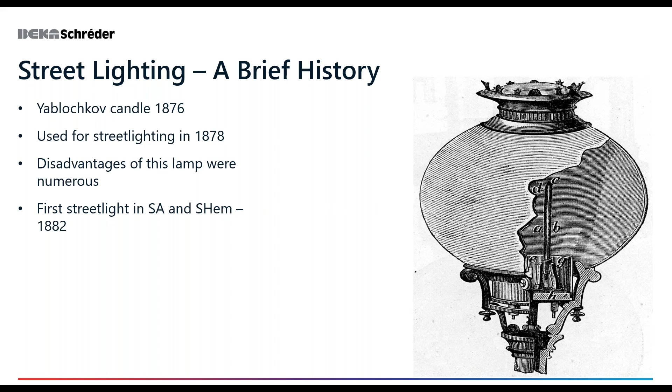The first streetlight luminaires in South Africa were installed in Kimberley on the 2nd of September 1882 on the Toitspan Road. There were 16 luminaires installed, of which 4 were placed on the corners of Market Square outside City Hall. This means South Africa was an early adopter of new technology a mere 6 years after the invention of the Yablochkov candle.

Okay, we're going to quickly go through the definitions that are very important to be understood when looking at road lighting design. So I'll move through these. We have a lot of substance to go through, so I'll try to do it as quick as possible, but without neglecting the definitions or the metrics.

So the first metric we're going to discuss is luminous intensity. The luminous intensity is the power of a light source to emit light in a given direction. It is the luminous flux emitted per unit of solid angle or steradian. The luminous intensity is a quantity for characterizing a light source and its perceived brightness.

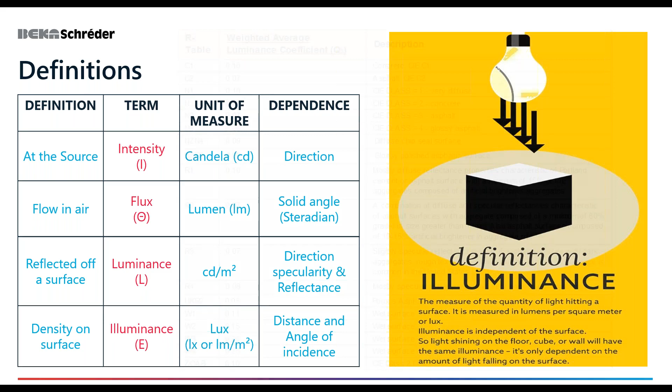Road surface reflection is a function of the physical state of the road, its nature, the direction of illumination, and the conditions of observation. Here you'll see a table showing all the different reflection factors used internationally, and there are many more. This can change. It's almost innumerable, but these are your standard reflection coefficients. Different pavements have different reflection characteristics, which depend on the texture of the surface, its age, the materials included in the pavement, the binding materials, the paving method.

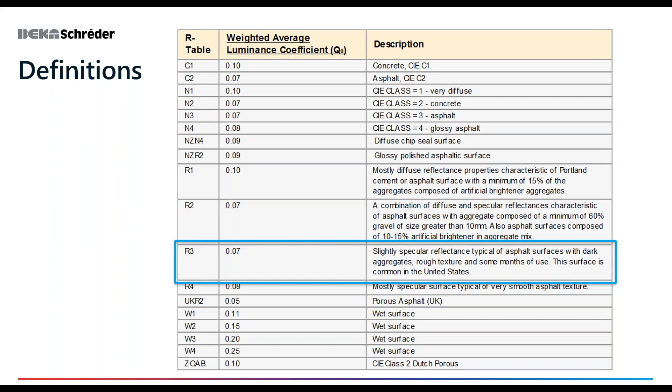And you'll see that we in South Africa base our standard calculation on a reflection factor of R3 0.07. This is a slightly specular reflectance, typical of asphalt surfaces with dark aggregates, rough texture, and some months of use. Some months of use means basically we're using a reflection factor that is typical of a new tarred road. This surface is common in the United States, but it's also the one we use as per CIE 140 in South Africa, and that is what our standards are also based on, CIE 140.

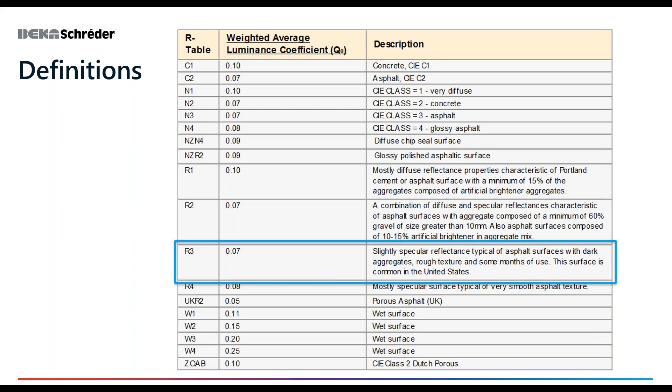It's also a conservative way of calculating the spacing between poles, because if you went up to an R3 0.08 reflection coefficient, you would have a slightly more specular type of reflection, a bit more mirror-like because of all the driving and friction over time on that road, and this would potentially give you the option to increase spacing, but it's not what's done as a standard practice, and this is something that you, the client, will be able to tell us: listen, this is a R3 0.08 road, please design according to that. But generally we will stay with a R3 0.07 new asphalt reflection factor.

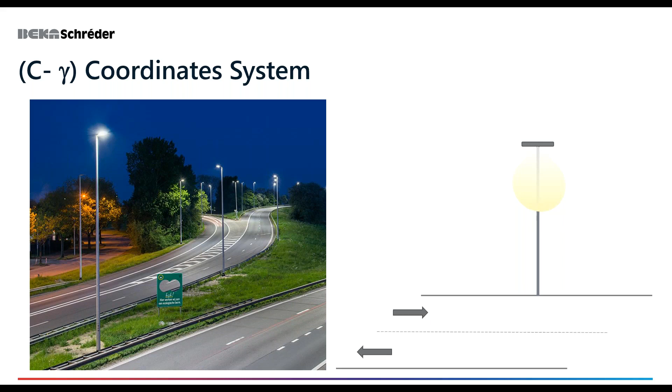Okay. In street lighting, it's also important to know and understand the orientation of the luminaire. In order to do this, it's necessary to know the standard coordinate system used to photometer a streetlight luminaire. There are two axes that are used, known as the horizontal or azimuth angle and the vertical or gamma angle. And in this little animation, you'll see these planes. C0 is to the right of the luminaire as it's facing the road. C90 is to the front, commonly known as roadside. C180 is to the left of the luminaire, and C270 degrees is behind the luminaire, commonly known as the house side.

The vertical angles, which you'll see there in the animation: for the vertical axis, also known as the gamma axis, the luminaire is photometered according to the CIE system of allocating vertical angles relative to the lamp. 0 degrees indicates the position directly underneath the lamp, also known as the downward vertical or nadir, with 180 degrees being the position directly above the lamp, also known as the zenith. The vertical axis is divided into 36 measuring angles, also known as the elevation angle, or more commonly the gamma angle.

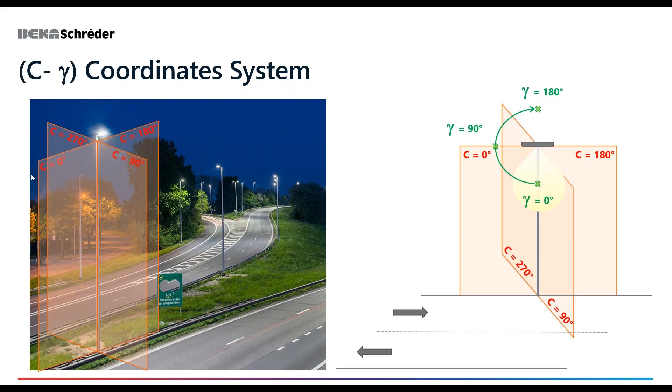The polar diagram is something you'll typically see in any manufacturer of luminaires' catalog or brochures, and something that quite often happens is clients or stakeholders don't really... A lot of people are afraid to ask questions about the polar diagram. And it's actually a very simple diagram to understand, and that's the intent of this slide, to just make this a little bit more clear.

When looking at the polar diagram, you will notice three distinct planes, of which two were mentioned in the previous slide, and their corresponding intensity values in candela per kilolumen at different angles. The candela values are expressed in candela per kilolumen for a good reason. Instead of making 2 or 20 different polar diagrams for the same photometry or lens that was used at different correlated color temperatures or driving currents, we simply plot the results for 1,000 lumen or 1 kilolumen.

This means, very simply, that if a lamp has a nominal output flux of 2,000 lumen, we would simply multiply by a factor of 2. And if it has a nominal output flux of 5,000 lumen, we would multiply by a factor of 5. It's really that simple. You'll see in that image there, I've tried to make it very clear how the luminous flux is emitted from the luminaire. In red, you will see I've created the physical shape of the luminaire.

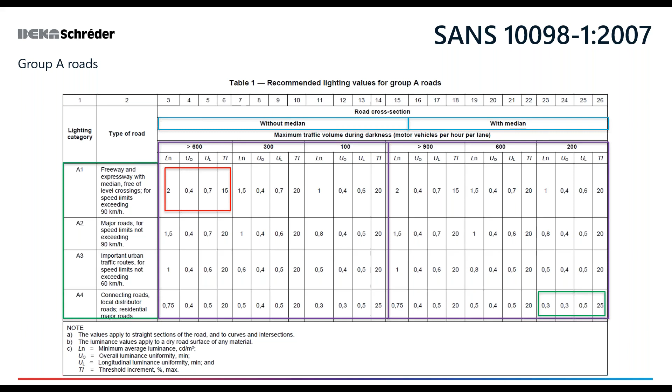Okay, then moving on to B-class streets. Just for your information, a street and a road: a street is normally determined by the fact that it has walkways, walking areas next to the road. So it's generally in built-up areas where there are residences and shops and so on. That's just for interest. B and C class streets are where illuminance levels are considered. So that's the type of light that can be measured but not seen. We design for illuminance in these areas because they are more dynamic regarding the type of road user.

On an A class type road where we're working with luminance, you're really only expecting to be sat in your truck or motor vehicle or motorcycle, looking ahead of you for extended periods of time. But in a B class and C class road, it's a much more dynamic environment. You have cyclists and runners and motor vehicles and the neighbor's cats, and these all could potentially pose risks to the person using the road. So therefore, we intend to ensure that there is enough volume, if you like, of light in space in this area, so that on the road, the measured incident light will not be lower than the required standard.

The environment is such that the driver might not be, as is the case with A-class roads, only looking ahead for extended periods of time, but rather that they might be expected to look around more often in order to avoid that neighbor cat or the kid or another car making a bad decision.

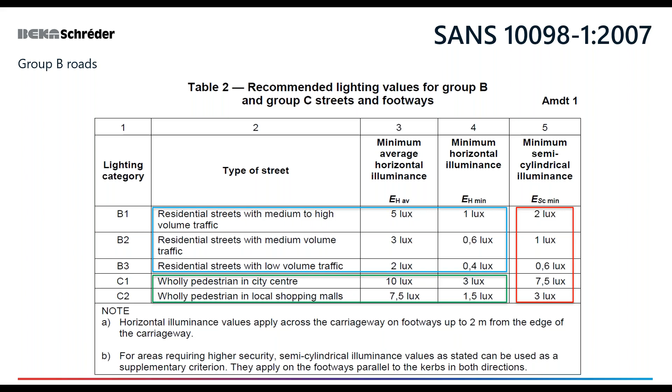Okay, we'll then move on to the software that we use. And in this case, we're using Ulysse 3.5.2, which is the latest version of Ulysse. You'll see the database version there is 2020, that's this year, January the 29th. So it's the latest version of Ulysse. And what you can expect to see in such a report, the most important bits of this report.

Now that we have a foundational knowledge of the metrics of a polar diagram and of the differences between the classes of road or street, we can now interpret the design or the report that is produced by the designer much better. So typically what we would do for Ulysse 3.5.2 is, once we've done the calculation, we would generate a report, of which there's obviously the front page explaining exactly what is going to be seen.

So in designing for a road or street, it is important to ensure that you show the client the luminaire or luminaires that will be used for the results. So you will put a nice image of the luminaire to be used or that was used for the calculation.

You must then show the standard which was used to calculate the results. So our standards are SANS 10098 part 1 and 2, and they're based on the CIE 140 standard. So you can see that that is the standard that was used, if you look just below the luminaire, to do the calculations.

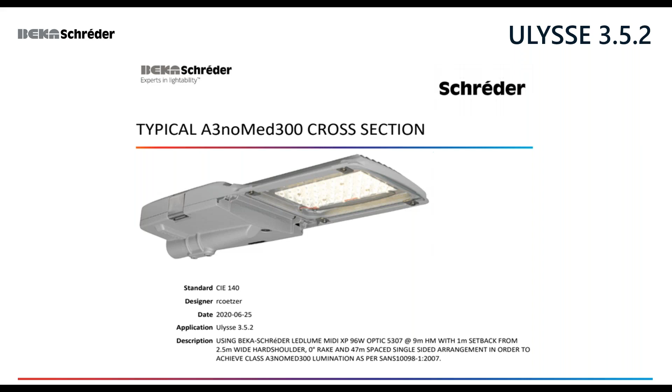This is a pseudo intensity diagram or a false color image, and these types of images are not part of the default contents of Ulysse, but it's very important for us as designers to communicate as clearly as possible what and how a design was done. So that is why we choose to include images such as the pseudo intensity diagrams, and they are shown in an isometric fashion because it gives you a three-dimensional environment where you can see the poles and luminaires and how they're situated in space in reference to the road, as well as the overall geometry of the roadway.

So once you see this, you can see, oh, hold on, it's accurate, or no, there's something missing. Where's the cycle lane, for instance? And this is a nice way to quickly see, just as a broad overview, has the designer calculated correctly? Also, like I said, you can see there's the setback of the luminaire, but we're going to get to another slide where that is made clear.

I'll quickly go through the next 5 slides just to ensure a simple understanding of these images that can be generated by the designer in Ulysse with the client's ease of understanding as the main prerogative. So like I said, this is a pseudo intensity diagram. This is a very nice way to understand, because a lot of the time it's one thing to see 2 candela per square meter with 40% overall uniformity and 70% longitudinal uniformity. But what does that mean visually? What am I expecting as the road user?

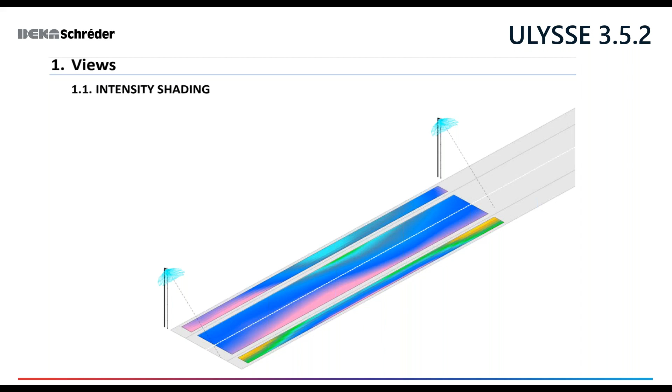So if we only look at the driving lanes, you'll see that there's a green area right between the luminaires in the center of the first lane. That would potentially be the brightest spot of lighting, and then it starts shading into a pink where you might have a darker area, but it's dark relative to the bright. It's not that there's no light, and we'll see that with the legend a little later on.

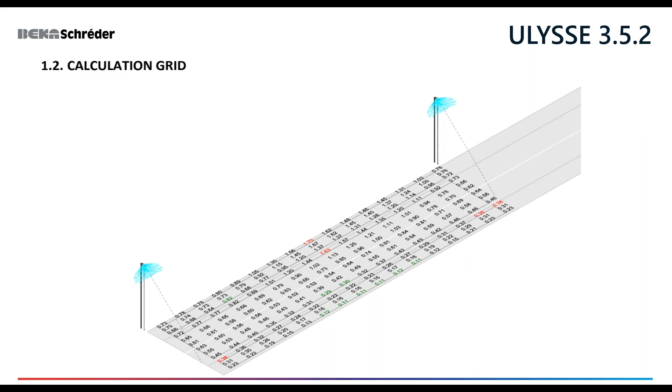You'll also then see a calculation grid, which we also include, because it's nice to have all the images showing all the different visual interpretations of what you can expect. And here you will see all the candela per square meter values measured at those individual points, and your ISO lines basically connect all values of the same candela per square meter, and then you have this really nice interpretation. In a later slide I've superimposed these, and it gives you a very good understanding of how the light is interacting with that area and how the observers are experiencing this driving environment.

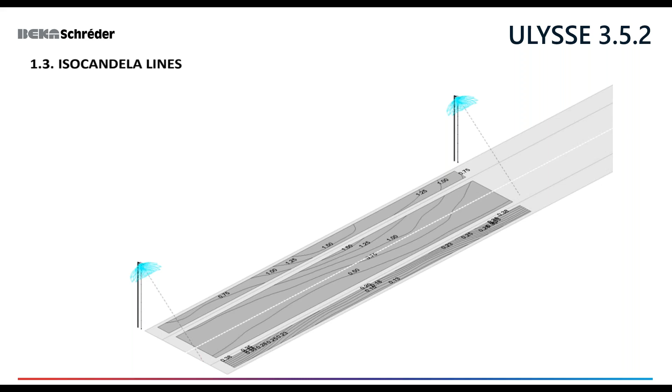Finally, we also include a cross-sectional view. Generally, we say left, but it could be right. It doesn't matter. Just to show the rake, whether this luminaire has been raked or not, and where the peak intensity of this optic sits. So you can see this luminaire was not raked, which is always a good thing, specifically with regards to glare or threshold increment. And you can see that the peak intensity on this luminaire is quite far. It's actually reaching almost to the opposite side of that second lane, or the fast lane, if this was going in one direction.

Then we create this image that we build to show all the geometry in meters. So you can see that here we used a 9-meter pole.

It was 1 meter set back from the yellow line. You can see it's got a 150 mil spigot, so no real outreach, and we're achieving a 46-meter spacing to the relevant standard, and I'm going to get to that point. I've included 2 hard shoulders, and there you go. That's a 9-meter pole covering about, what, a 12-meter, 13-meter, or 14-meter road cross section.

We'll move on. You'll also then see all the information necessary about the luminaire that was used, as well as the optic that was used. In this case, it's a 5307 optic. And to the bottom right, you'll see the polar diagram, which I've showed you earlier. You can see the 0 to 180 and the 90 to 270 plane.

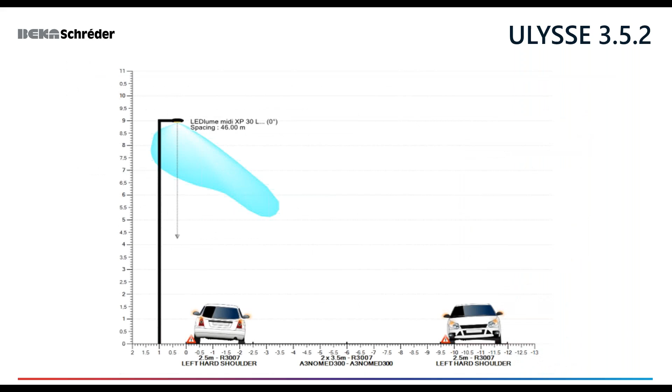We can see that going from the top to the bottom, there's a left hard shoulder. So that's obviously on to the left, where you can see left hard shoulder with the vehicle facing away from us. And then there's a right hard shoulder with the vehicle facing towards us. So coming down, the important bit is the area that's used by the vehicles for general travel.

So we'll see that we have calculated to an A3, no median, 300 class road as per SANS 10098 part 1. And to the right of that in bold, you will see it gives you the parameters that it needs to be compliant with. So we need to achieve 0.6 candela per square meter, an overall uniformity, which was your minimum to average, of 40%, a longitudinal uniformity of 50%. And by the way, longitudinal uniformity will always be higher than overall uniformity.

And then finally, your threshold increment, which is your percentage increase for disability glare for sources of direct glare. And there you can see we're achieving in lane 1 for observer 1, 0.64 candela per square meter. We're 43% overall uniformity. We're looking at 53% longitudinal uniformity. And then at the bottom, the TI is perceived as 15.3. So we're far under the 20% allowed.

And then observer 2, you can see is a 0.71 candela per square meter luminance. So we're achieving quite comfortably the 0.6 required. We've got a 41% minimum to average, so that would have possibly been the limiting factor. And then you have a longitudinal uniformity of 61%.

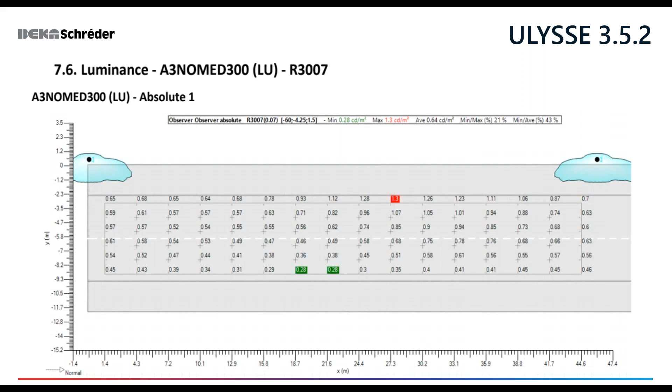This is where I would explain the first 3 images, the pseudo intensity diagram, the calculation grid, and the ISO lines. And here you can see this is typically for observer. It says absolute 1, that's observer 1. Standing 60 meters away facing the direction of travel, and you can see that they are perceiving from that position at 1.5 meters above the ground with a reflection factor on the ground of R3007, a 1.3 candela per square meter maximum with a 0.28 candela per square meter minimum.

We then overlay the ISO lines, and we can see how we're starting to build a visual interpretation in our mind of how the light that we actually see might look, and where we can expect bright with reference to dark, or dark with regards to bright, and then the pseudo intensity diagram. And that's a very simple way of understanding those 3 images that we include.

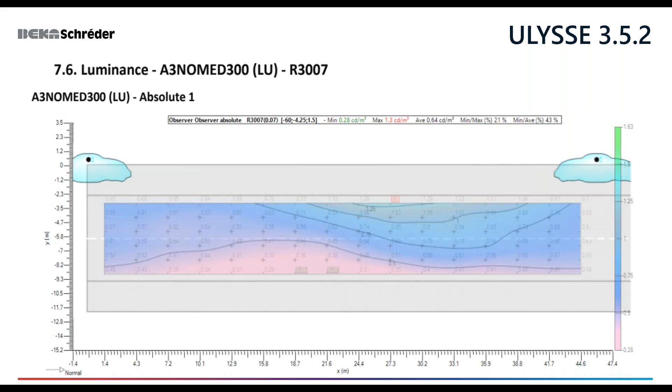So you have an isometric view, and then you have this plan view facing down. Also, you can see the way the flux is emitted by those 2 luminaires on the pole or on the poles. And then you have the exact same for observer 2, absolute 2. Okay, so that's in a nutshell the basics you need to understand so that you can interpret road lighting design. And these are some of the things we have to take into consideration at all times.

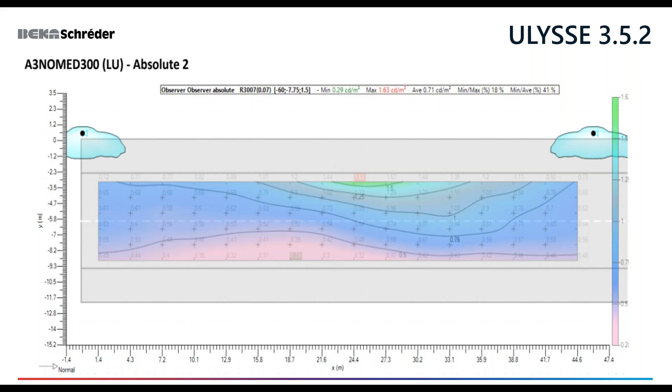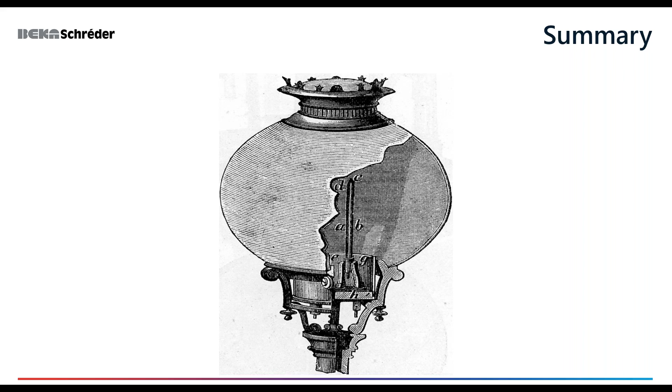I'm going to quickly summarize what we've been through. The first thing was the Jablochkov candle, and that South Africa was an early adopter of street lighting. In fact, we had the first electric street lighting in the Southern Hemisphere. So take that, Australia.

We then moved on to understanding these metrics, and that you have your light output, which is luminous flux. That's the flow of light in space. You had your light level, which is illuminance, lux, or in America, it's foot candle, lumen per square foot.

The lux can also be called lumen per meter square. And this you cannot see, but you can measure. It's the light incident on a surface. Then you had your luminous intensity. This is the candela. We saw earlier that you can measure 1 lumen per steradian in a meter square, a sphere, or a sphere with an area of a square 1 meter.

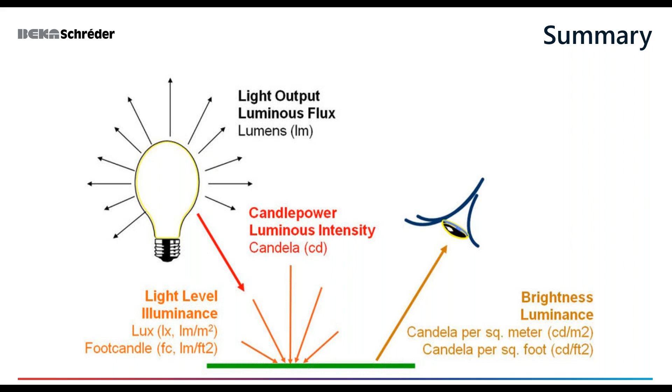And then you had your brightness, your luminance. This is what you're actually perceiving. This is what you're seeing, and that is measured in candela per square meter, or in the States, candela per square foot. This is my attempt with my ninja skills at paintbrush in explaining how a luminaire is facing the road. So you have your road side 90 degree and your house side 270 degree. Right of the luminaire is 0 degrees, left of the luminaire is 180 degrees.

The blue being the emitted flux, which is lux, you cannot see but measure, and actually you measure it at the surface. And then the yellow being how that light might fall onto the surface, having reacted or interacted with the R3007 reflection factor or other reflection factors, and how it might look.

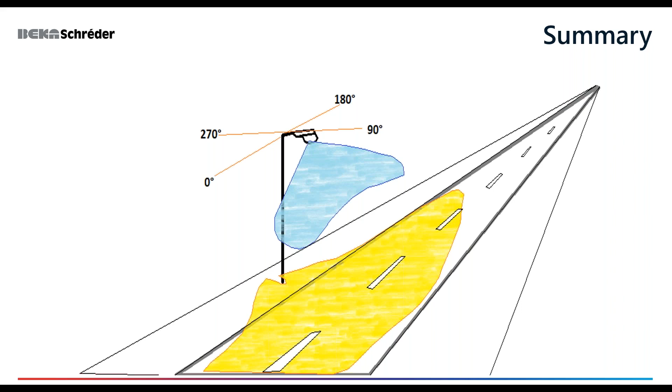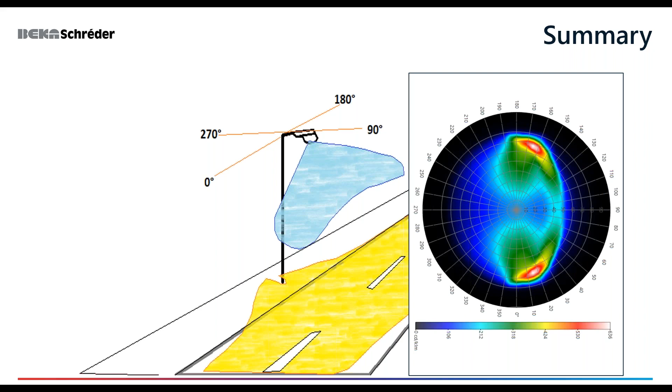We explained that A-class roads are luminance type roads where reflection plays a big factor, and that this is for the light that you can actually perceive visually. And then that you have your B and C-class streets where illuminance is measured and calculated for, and this is the type of light you cannot see but can measure. Any questions?

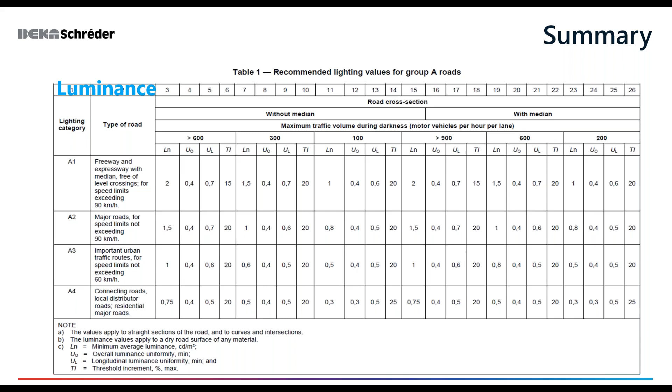A2 is a major road for speed limits not exceeding 90 kilometers an hour. A3 is important urban traffic routes for speed limits not exceeding 60 kilometers an hour. And then A4 is your typical connecting roads, local distributor roads, residential major roads. And then obviously your B, it explains it there. But then the question is primary and secondary roads.

I think generally with your A-class roads, you would have primary and secondary in both classes. Your A1 to A2, maybe even your A3 could be primary A-class roads, with the secondary being your lower level of A3 all the way to A4. And then the same for B. You could have a primary B-type road being your B1, and then the B2 and B3 could potentially be your secondary roads. But I'm speculating. Okay.

Do you have, sorry, I'm going to read this. Do you have LED bulbs that can replace street lights, 150 watt HPS, 250 watt HPS, and 400 watt HPS, so as to have a simple removal of the bulb instead of replacing the whole fitting? What is assumed in that question is that it is a matter of wattage, and unfortunately, this is a misconception in technology, because HPS has a very high efficacy, and LED compared to HPS at this point is still at the lower efficacy, although we're creeping up to it quite quickly.